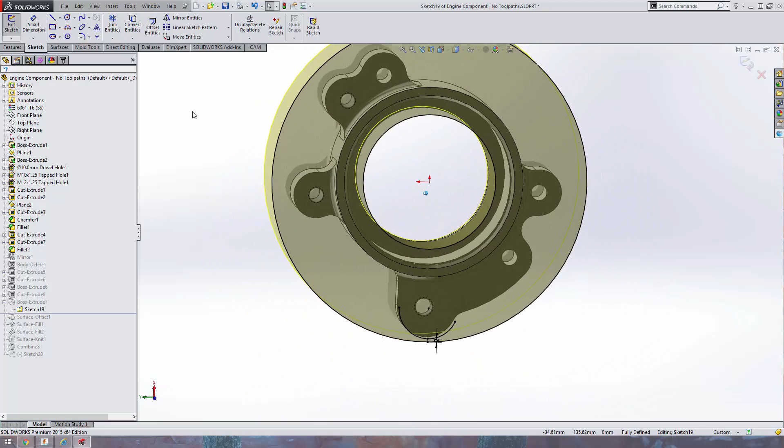First, I'll show you how I went about modeling the stock. This part was turned out of a round piece of cylindrical stock, so I replicated that by creating a sketch, modeling it off the center point of the bore, and extending it out as far as needed to get clearance off the largest radial tab in the model.

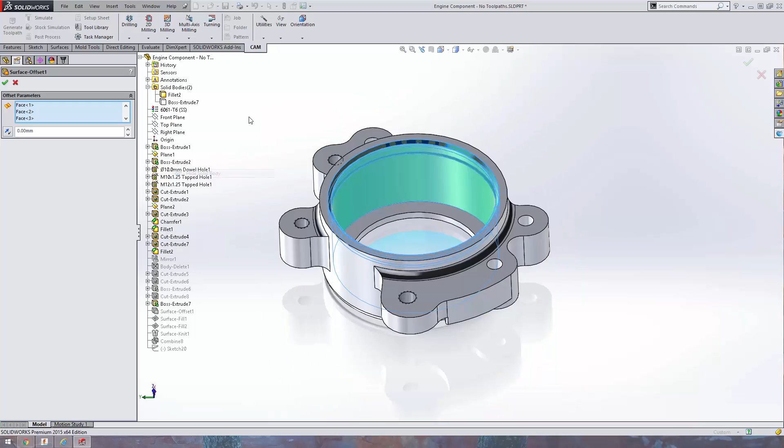That was fine, and I had a hole through the middle, but as you can see here I still had more material to remove. So I offset some surfaces - if I hide this body, you'll see I've offset all the relevant internal surfaces so I can patch up the result using two surface fill surfaces. Then I knitted those together into a solid, which allowed me to do a combine subtract to end up with a piece of stock that looks like this.

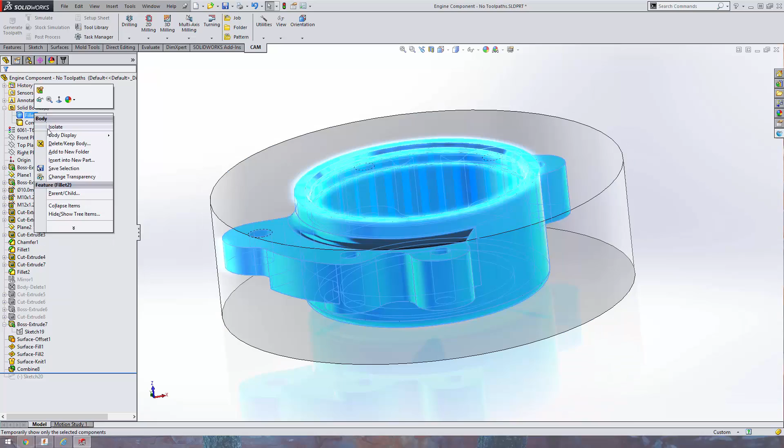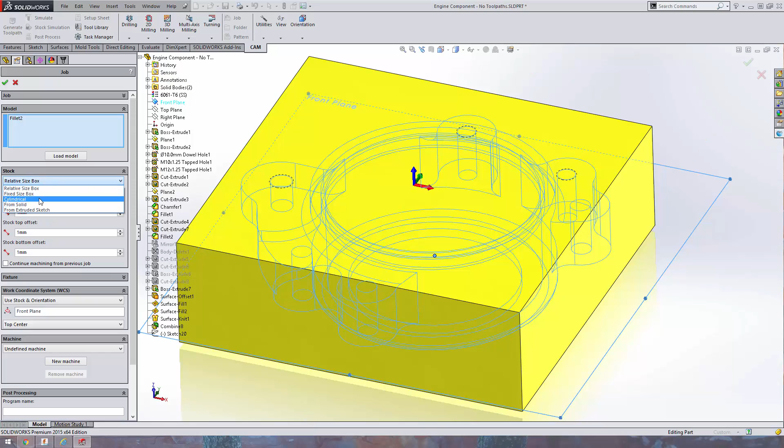At this point I was able to set up my first job. Make sure you select the model - you can select it on screen or from this flyout browser. For stock I'm going to select from solid, and from the browser I'll select my combined body. I don't need to continue machining from the previous job because this is the first one.

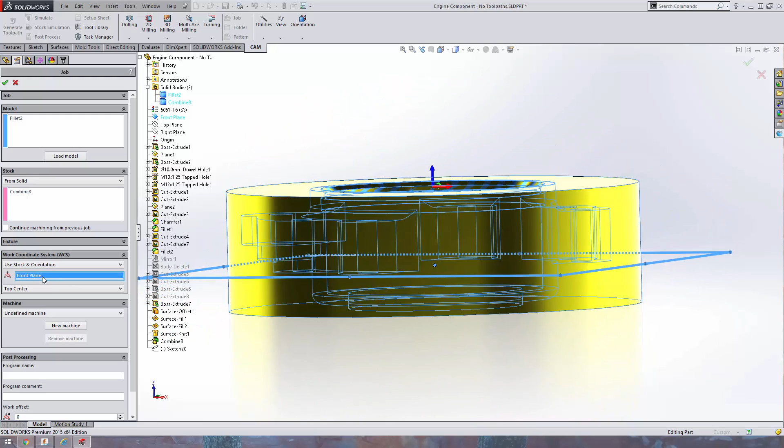I'm going to stick with stock and orientation, but I need to change my front plane. Looking at this, I need to make sure I'm machining it from this side first. My Z-axis is pointing in the wrong direction, so if I clear this selection and select this top face, now the Z-axis is pointing the opposite way, and I'm happy with top center.

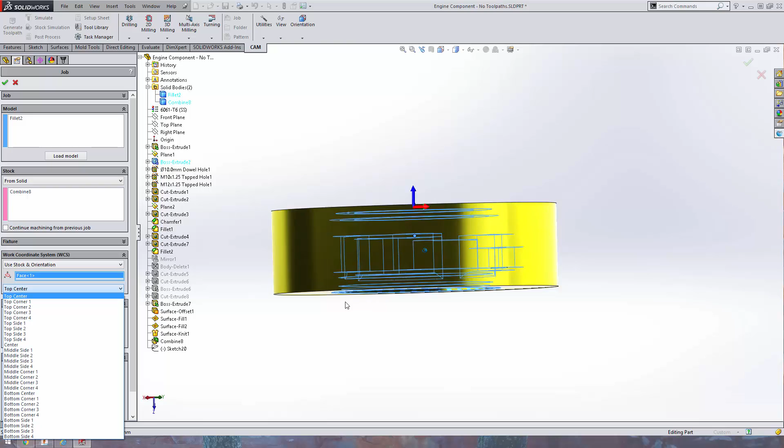So putting this on my mill, I've got a bit of excess stock on top - the bottom face has been faced off on the lathe, so I'm good with that. I can create my G54 work offset with the control at the center of this cylinder, which is perfect. I don't need to set anything else. So I've got my stock defined.

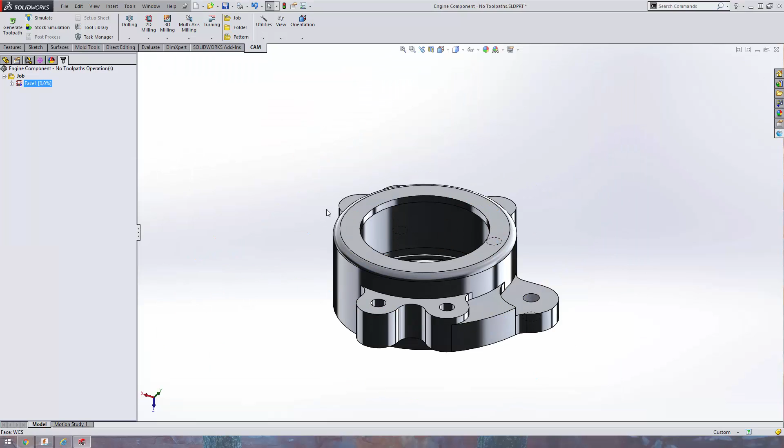The first operation I'm going to do is a simple facing operation. I'll come into my tool library and select the 50mm face mill. These have all been saved into my document, but you can pick them out of the library shipped with HSMWorks, or create custom libraries. I don't need to select anything else, and that's it - I've just faced off the top of the part down to this edge here. Now I need to start looking at how to remove the rest of this material.

So let's use 3D adaptive clearing. I'm going to change my tool. I'm going to use a 16mm flat end mill.

I don't need to select anything in the geometry tab here, but down at rest machining I want to make sure I change to from previous operations, because I want the toolpath to take account of the fact that some of the material has been removed in the previous operation by the face mill. And I'm happy with all of those settings there.

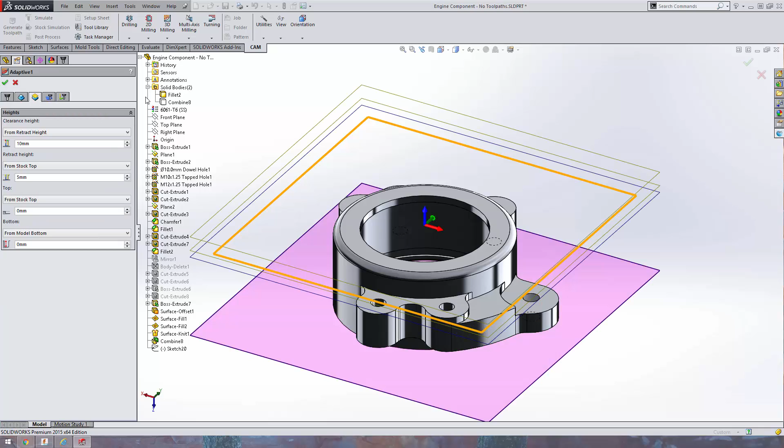I don't need to do anything else, but I do want to make sure that I go 1 mil past the model bottom.

Now in the real world I'd probably leave a bigger flange on the bottom of that because I want to hold on to it in the vise, but at the end of this series of videos I want to have a simulation that's just going to have a completely finished part.

Okay, so here I'm coming straight past the bottom of the part by 1 mil. Then in the passes tab I'm going to change over to a larger step down because I've got a 16mm tool.

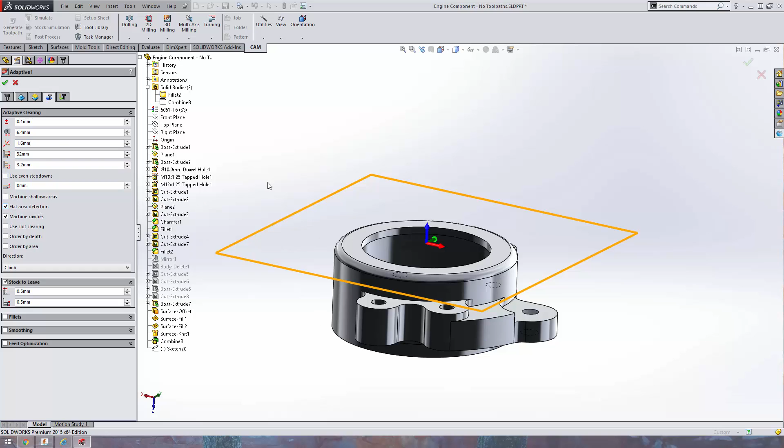So I should easily be able to go 2 times the diameter in the depth. So it's a 16mm tool, so I'm going to go with 32mm, and I'm going to turn on flat area detection. Now what this does is it looks down through the model and it finds all of the different horizontal planes at the different heights.

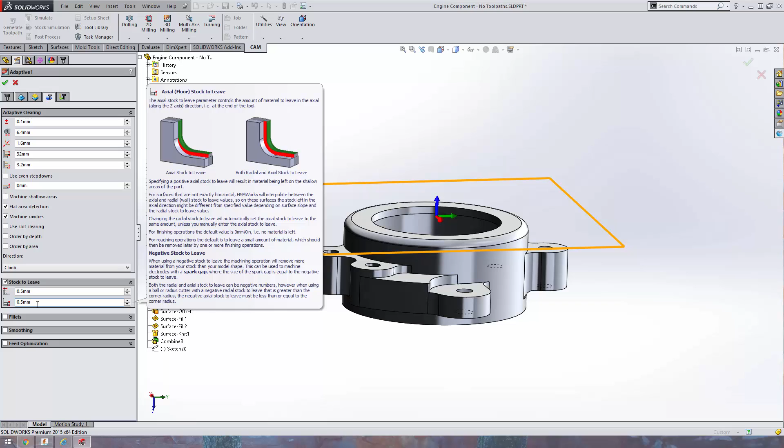And if they fall in between the 3.2mm fine step down, then it's going to adjust the step down slightly so that it can generate a toolpath that's within 0.5 of a millimeter axially from that face. It's going to leave 0.5 of a mil of stock on the horizontal faces.

And I'm going to leave all the linking and leads as default. So while that's generating, I can move on to do the next one.

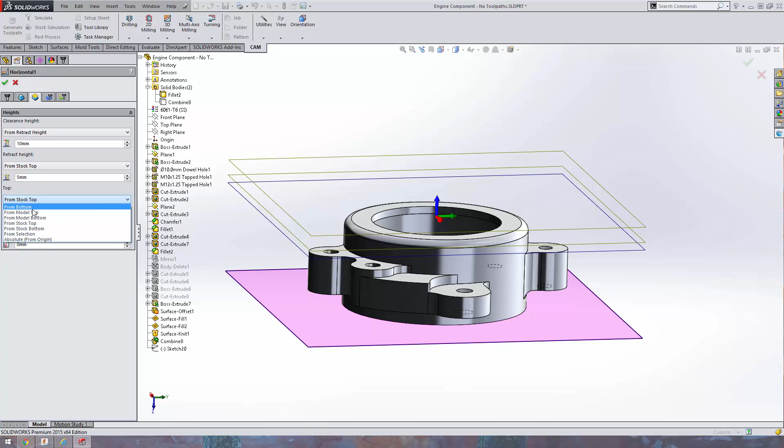So I'm going to use horizontal. I'm going to keep using the same tool, and from the model top I'm actually going to change the top height to model top minus 1 mil, because I've already surfaced the top face here and I don't want this horizontal strategy to drop any toolpaths on it.

Because what it does is similar to flat area detection, is it looks down through the model and finds all of the horizontal faces and applies toolpaths to them without having to select them all individually.

I do want to leave some radial stock to stay away from these walls, because I'm going to come back and do a finish pass to clean those up, but I want it to be a finish pass on the horizontal faces, so I'm going to set that to 0 on the axial stock to leave, and I'm going to leave all the linking and leads as default.

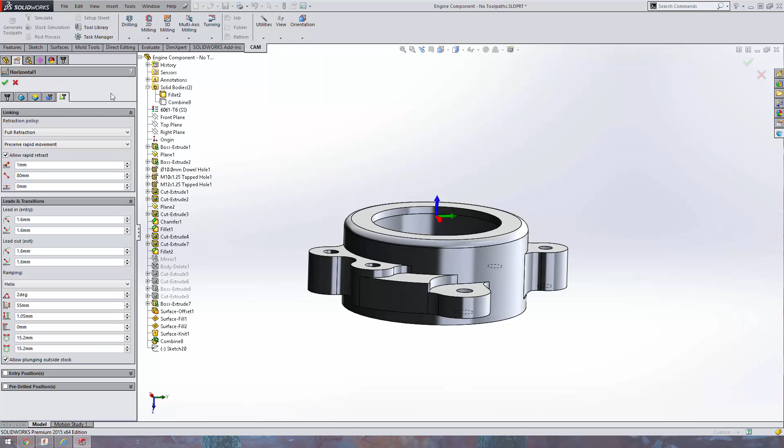If we do a quick simulation on this stock simulation, we'll see how far along we've got. We've got pretty far along the way of removing most of the stock from this side.

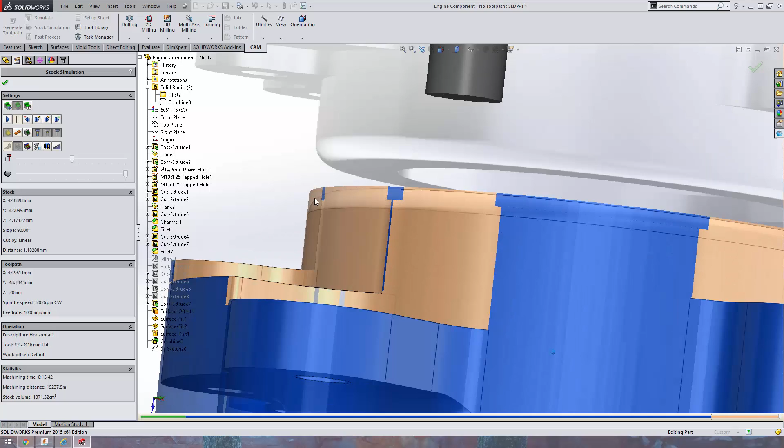Now we just need to start doing some finishing passes on the walls of the model and apply the, if we turn this transparency on here, come up with a toolpath to surface this fillet on the top of the job.

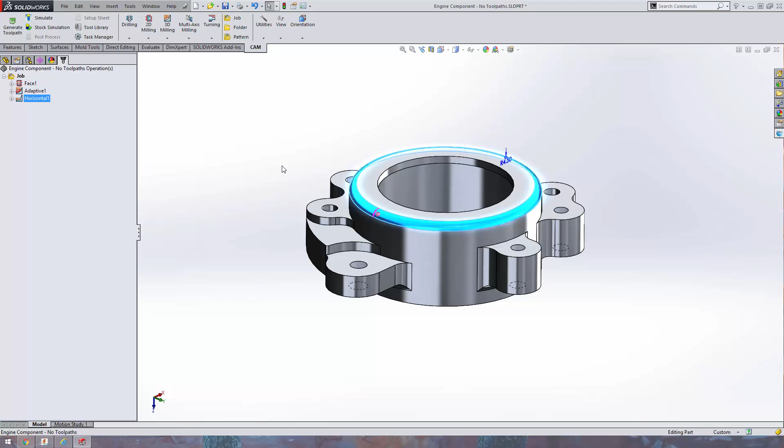Join me in the next video to apply some 2D contours to finish off some of the vertical walls on this part, using both model geometry and also making use of the Create Silhouette tool. And then finally we're going to go around and apply the flow toolpath to this particular fillet here to create a finished surface. Thanks for tuning in, have a good day, and we'll see you next time.